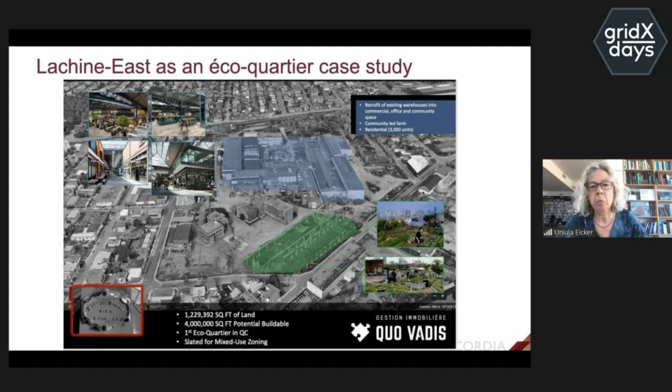So when we work on district case studies - and there's a lot of old industrial settings here in Montreal that get redone - we talk on the building sector, basically on the full spectrum of problems. How to create net zero buildings, integrate local renewables. Montreal has very ambitious zero waste concepts, but we are very far off it. And then there's this whole mobility topic, and biodiversity and inclusion. So lots of topics that you need to tackle if we talk about such a district development.

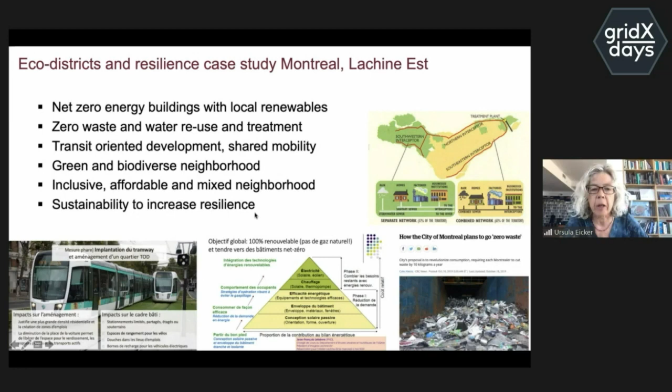And there's many players involved. So what we do as a university partner in these projects, we come up with digital twin strategies. My whole team of 50 graduate students now work on developing tools to model these transformation scenarios, and also provide operational strategies. We developed an open source modeling platform called Insel4cities.

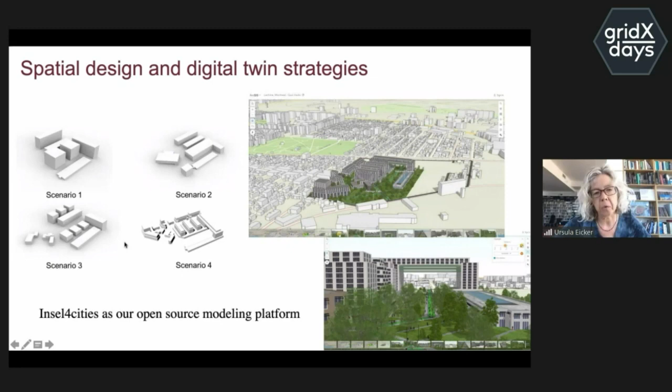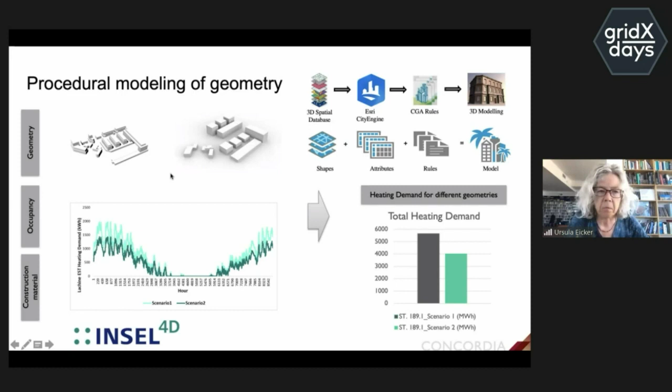The first step is always to come up with geometry scenarios to basically model a district densification or new development. Once we've got a few geometry scenarios, we have a full workflow to calculate heating and cooling demand of every individual building, and then do different scenarios for window-to-wall ratios, insulation standards, and so on, and of course renewable integration into such districts.

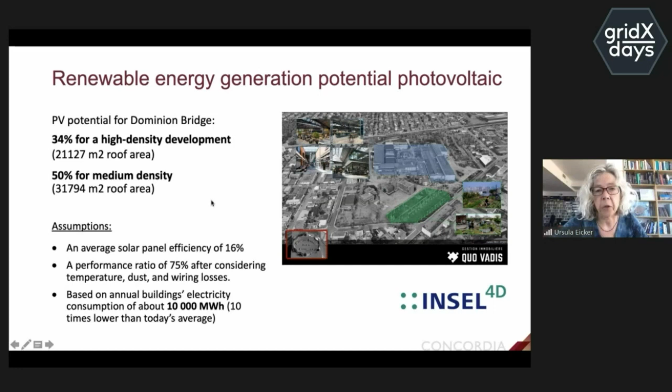So we model the photovoltaic potential, for example, and depending on density, you can cover 100% if it's a low-rise development. But here we focus really on medium to high density developments, and then the local renewable fraction goes down, of course, maybe to 30 to 50%.

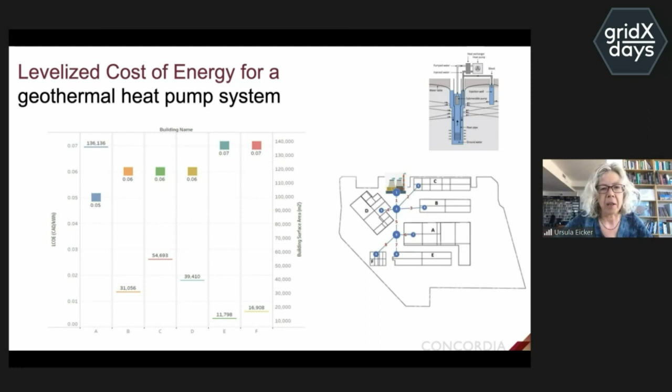And then we look at the energy systems, including comparisons of central versus more decentralized solutions in the building complexes, including the distribution network modeling. So here we recommended geothermal heat pumps for the system. I don't have time to go into detail, this is just a very short overview.

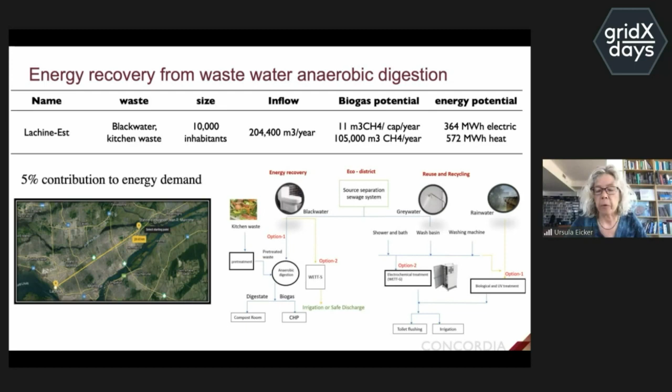And then we look at the other contributions from waste, which should be reduced, or wastewater, which is always there. If you look at the district in the southwest of Montreal, there's only one central wastewater treatment plant, located on the other end of the island, meaning pumping the whole sewage waste 30 kilometers. So we're looking for local wastewater-to-energy solutions using anaerobic digestion, which could contribute another 5% to the demand of that district.

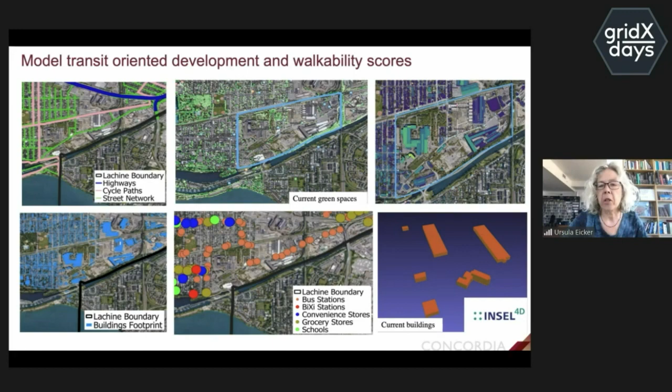So on the whole, with this platform approach, we try to model the integrated concept of energy, transportation, and waste.

If I summarize quickly the main lessons learned from this kind of analysis: if you build compact geometries, you can bring demand down by up to 30%. But still, insulation standards and building efficiency standards are the most influential factor, which can triple heating or cooling demand. So it's much more important to get the building efficiency right, and the building codes here leave a lot to be desired, let's say. Then you can really achieve 10 times lower electricity demand because we went for heat pump solutions, and we can cover half of that with solar photovoltaics to increase resilience.

At the same time, these kinds of high density developments improve walkability and access to public transit, and thus reduce transportation related emissions.

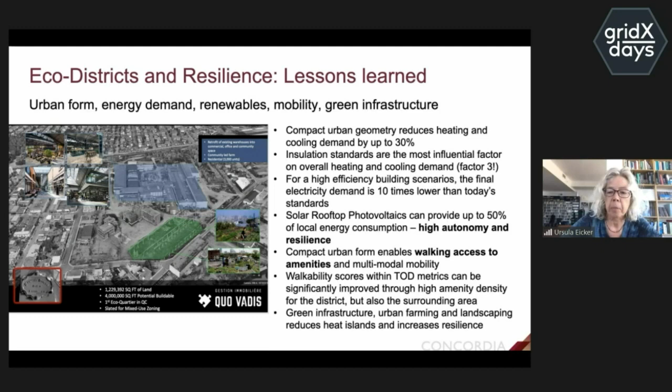Maybe to finish off, the lessons more on the regulation side - how do you make that happen? This is not municipally owned land, it's privately owned land, so there's a limit to what the city can really do. The main instrument that works for creating higher than legal standards is the zoning process.

So if you want to get ecological standards going, the main instrument is basically giving developers more density, because that means they can create more profit, and then they can invest into higher building standards or affordable housing and so on. So that's the main lesson learned from that particular case study - that the process before the building starts is crucial to set these standards, if it's not municipally owned ground. And then digital twins, I think, are a very interesting option to support this planning process.

All right, that was a very short contribution from my side.

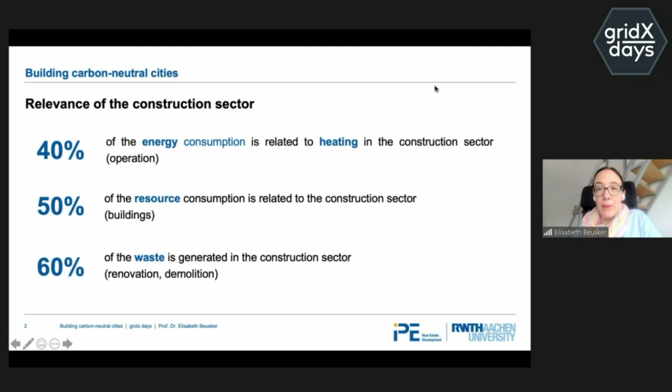What we have to keep in mind is that right now we are thinking a lot about new plannings and new developments regarding the next 5 or 10 years, and we tell ourselves a big lie, because we say the planners in the future will have to make a good planning and be responsible for the buildings which we build right now in a standardized way. And that's actually a big lie.

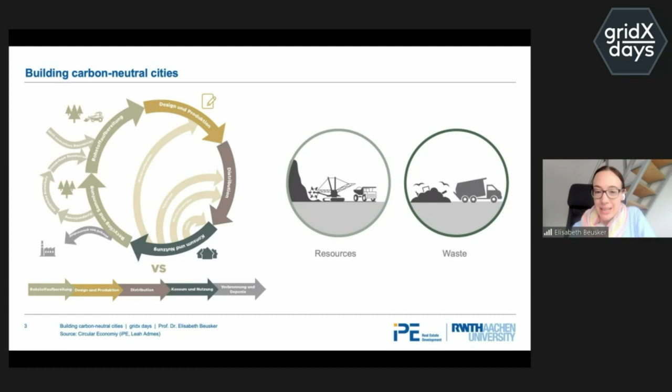We have to start now with better resource management and better thinking about how we deal with the waste we produce right now in the construction industry. And right now we are not doing it. We're just saying, okay, we make everything like we have done the last 20 years, and the planners in the future have to take care about the waste. That's not the way how we should do it now.

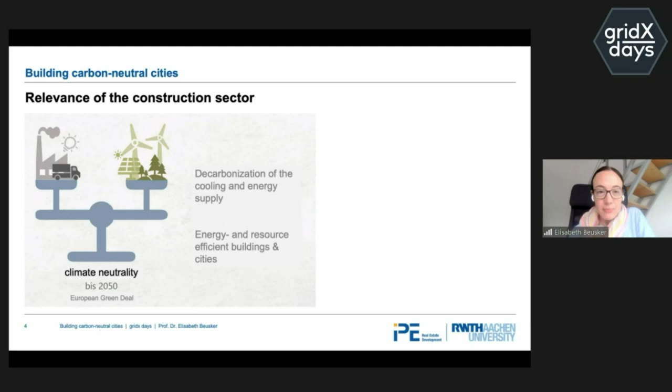So the European Green Deal gives us a big target for 2050. First is related to new technologies—we have to decarbonize the cooling and energy supply. Actually, I would say I'm not responsible for that part. But the second one is important: energy and resource efficient buildings and cities. This is something we have to focus on better, of course by integrating new technologies and new standards.

Okay, the first lie I have already mentioned: that the planners in the future have to do a better job than we are doing right now. This is the first lie.

And the second lie, I would say, is that at the beginning of a real estate development project, when we think about the scope, the use, what the investor would like to have, we are always thinking in buildings, which is not the best way. We should think about space, and perhaps also space which is already available. So the first target for reduction of carbon emissions in the building sector is to always think about minimization of spaces and volumes.

So the question is, do we need the space? What are the best synergies we could create between different functions? Can we hire space temporarily? Something like that—that's just the first question. Then the second and third questions are about how we can build sustainable buildings, and how we can develop sustainable urban districts and cities.

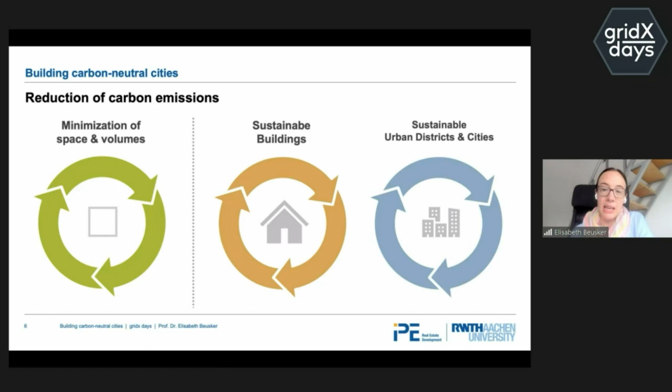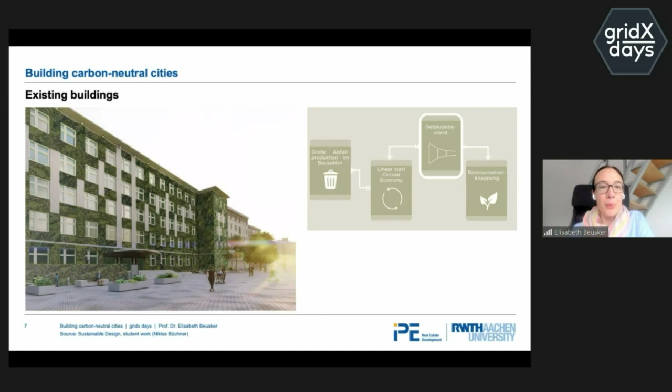Regarding buildings, I'd like to mention that quite often we think about new projects, and the standards and regulations, including funding regulations, are always related to new buildings. We have to change this in the future so we get much more power and money to refurbish existing buildings, because this is a huge amount of our building stock.

Normally, in normal construction projects, we take the top-down approach. We have an overview of the standards and regulations—how we have to build, what is allowed to build. We have our specific user for whom we build, and then we make a specific building planning for a specific site. What we are doing in Living Labs is actually the other way around.

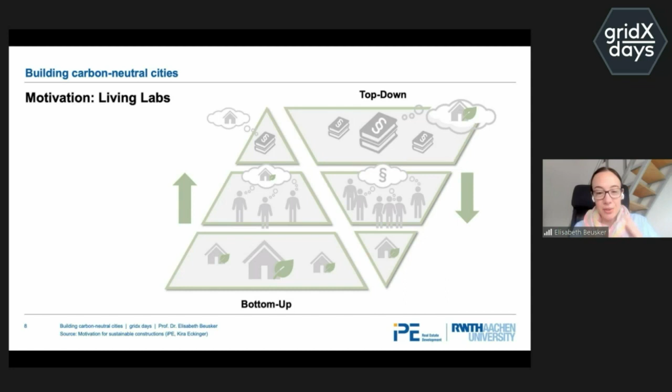So we say we would like to change regulations and standards. We do it with people, so we make a big participation part in the project, and we start with real projects trying to change something in the building process. This is the one Living Lab I would like to present today.

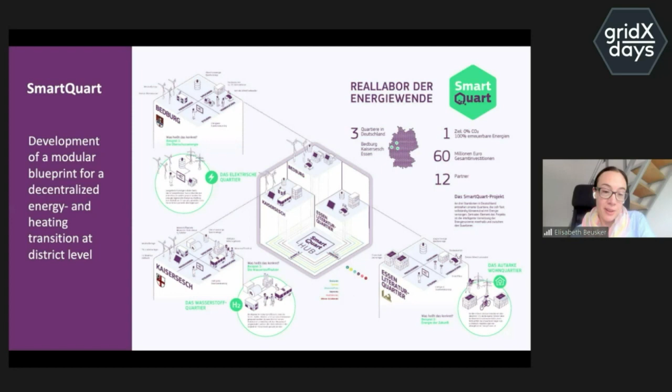It is called SmartQuart. It's running from 2020 to 2024, so around 5 years, and a lot of people, stakeholders and companies are included in this project. The core target is we have 3 urban districts—a living area, an industrial area, and a very dense urban area—and we are implementing different technologies to reduce energy and build them very resource efficiently. This is our overall target. Right now we are developing and planning these 3 quarters, and at the end we also would like to measure the operation numbers and make a monitoring.

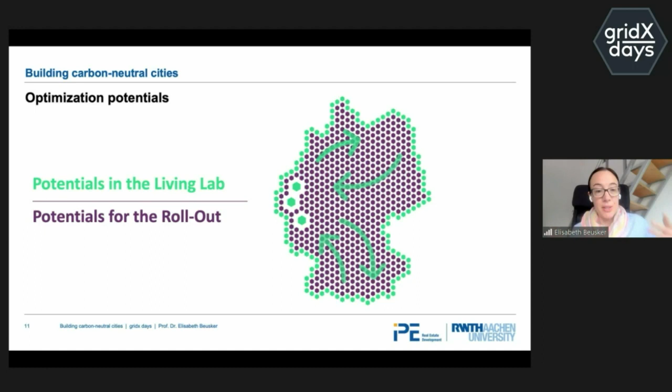What's very interesting, I think also Mrs. Eicker has mentioned it, is that in the Living Lab we can analyze the potentials on site, but on the other hand, we can evaluate the potentials for a possible rollout in Germany or further. So these are 2 methods we apply: first, to see how well we can achieve the targets we've set for the 3 districts, and second, how we can make the outcome more effective, since more regions are taken into account.

How we do it: we have defined five areas of intervention. So we make ecological analysis, social analysis, and economical analysis. And what's very interesting in that is that there is not only one direction of impact. So if you have a specific social group, you have specific economic targets, and you can apply or achieve specific ecological results. And there are different loops in that, and this is very interesting to see.

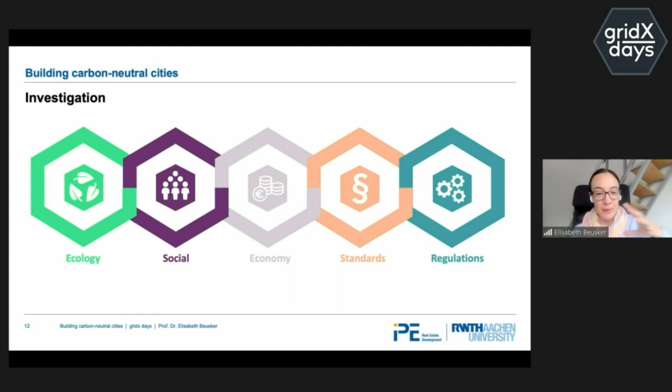What we also develop is that we check if the standards we have are good for energy and resource efficient planning, and if we need more regulations or funding and stuff like that to bring the people to more ecological and more economical planning. So there are different correlations between that, and it's quite interesting to apply.

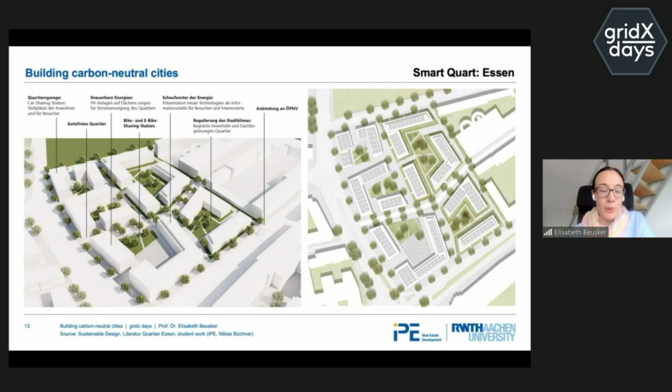This is just a view on the student work for one district, Essen, and we see that we have a lot of interventions in mind which we can imagine. It is linked to different districts, different functions, different energy movements between different areas, and of course mobility and new ways of water consumption and energy consumption are taken into account. The analysis is always carried out on district level and on building level.

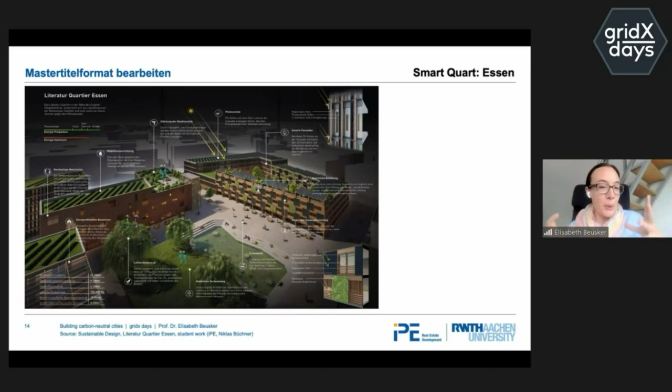So what we see here, for example, is that rainwater can be used for different functions in the building. And on the other side, we have to take care that we have a lot of green areas, so that we can use this water.

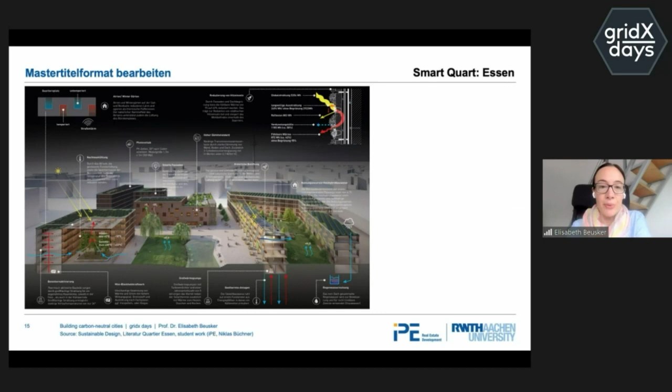This is just an example of facade planning. The building always interacts with the different sites, and we also go there in detail and think, together with the students, about what would be the most appropriate way for a different function at the specific facade and orientation.

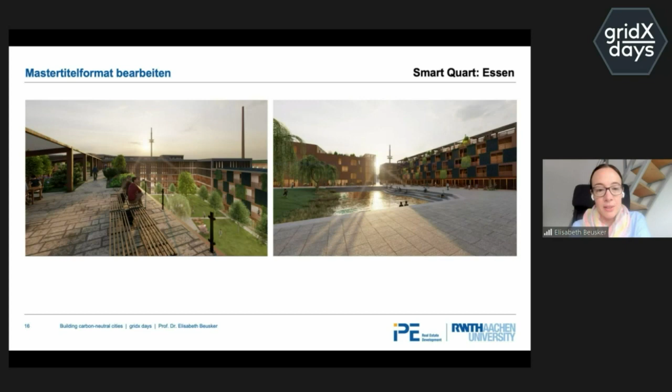And I think this is my last picture, also for the Smart Quart Essen, and it shows that at the end, the human being is in the middle. And we always have to make sure that people, a lot of people, are interested in the planning we develop for the next years. All right. Thank you very much.

Thank you very much, Elisabeth. And now into the Q&A. To both of you, what are the major challenges of scaling a pilot project or microgrid to widespread real-life applications? Starting with you, Ursula.

Well, in the end, you need to convince quite a diverse set of stakeholders to build it, because it doesn't seem to happen by itself. So I think it depends a lot on the governance structures and who is behind driving that change. And here in Canada, in the North American context, it's much more driven by private investors, I would say, and that doesn't make it easy because electricity is very cheap.

So there are a few boundary conditions where I think change will only come for small local renewable integration if there's a strong will of a municipality to do so, or of citizen groups, maybe more unusual stakeholders that drive the process. I think that's really key to get these projects going.

Yeah, I would say the same in the first instance, and then I can add that I think we have to get rid of the idea that we build as we have done in the last years. We have to be open to new ways of project groups and new ways of planning, integrated planning with a lot of synergy, which we can achieve if we have interdisciplinary project teams.